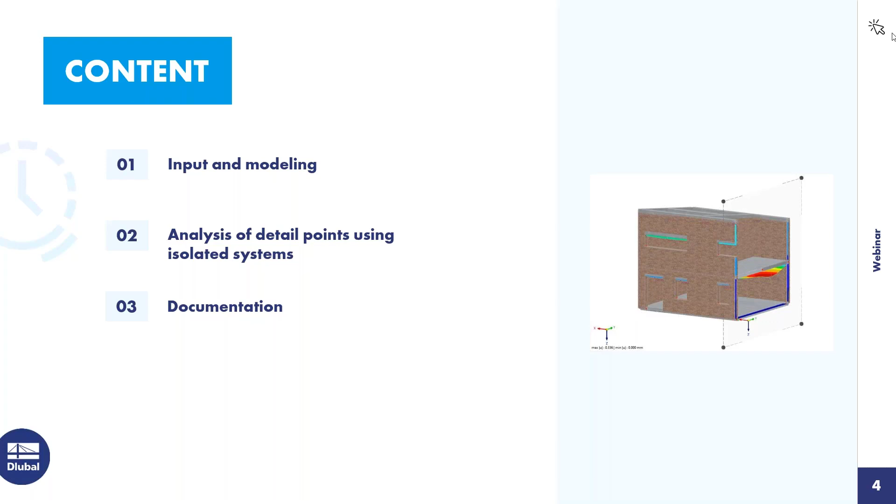So the content of today's webinar is masonry. Today I want to model a building from the beginning in RFEM. In the second part, I want to take a look at some detail points, especially connected to the masonry material. And in the last part, I want to show how you can document the results of the program.

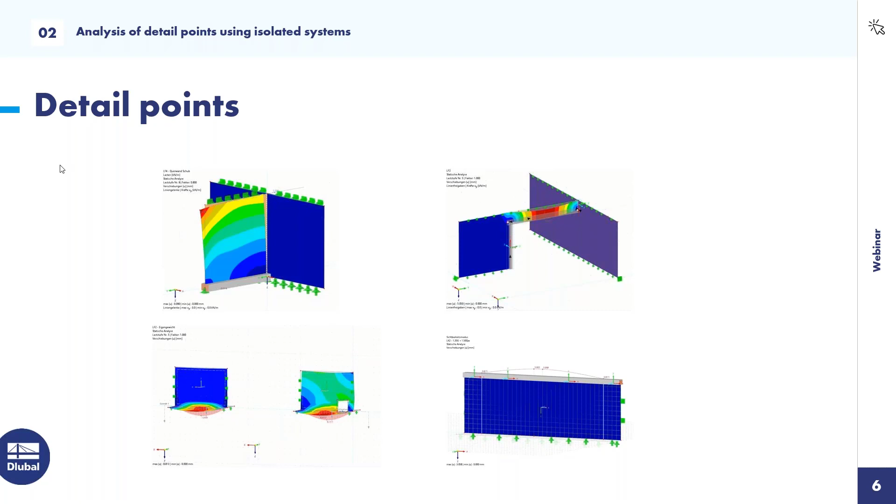In the first part, we will insert a small building in RFEM, and I want to show you how to do it. In the second part, I have chosen some separate models which I have prepared, to take a look at some details. And as I said, the last part is the printout report. So now I want to switch to the program.

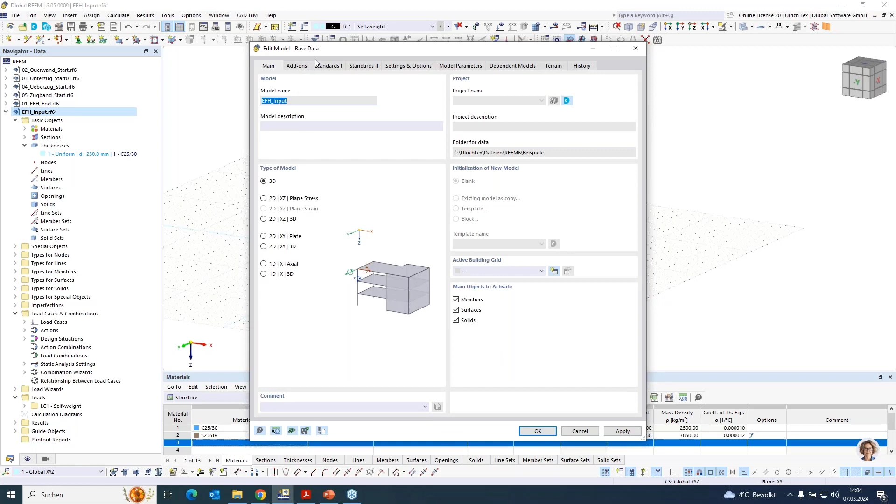Okay, I have already created a new file, a new project in RFEM. It is important when you create a new project and want to use masonry that you check the add-on Masonry. Otherwise, you cannot use the material model for masonry design. So as a first part, I want to create a new material.

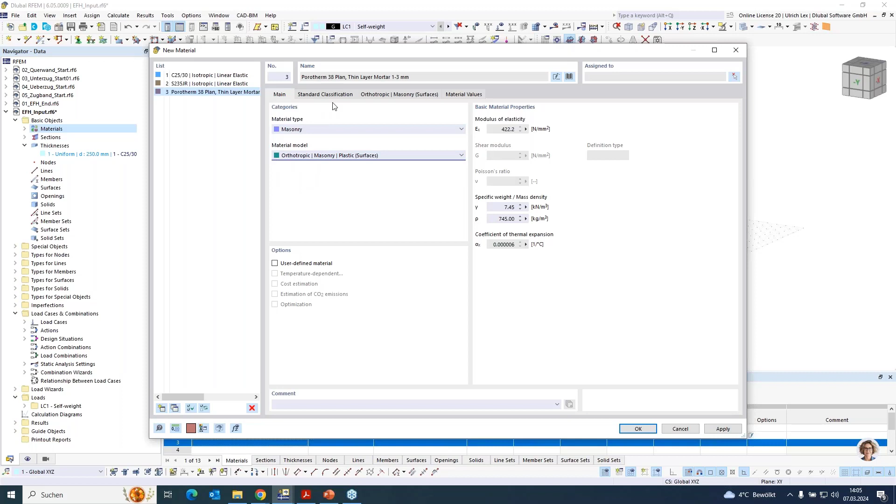You can use some values from the database with material type masonry. You can choose one product you want, maybe Porotherm 38, and you have to choose the material model, the orthotropic masonry plastic. If some products are not available in the database, you can also insert them manually.

In this tab, standard classification, you can choose the grouping of your product. You can choose the mortar you used. You have to insert the dimensions of the stone, and you have to insert the compressive strength. With all these values, RFEM automatically computes the data needed for the material model. That is the modulus of elasticity, the shear modulus, the allowable or ultimate compressive strength, or the ultimate tensile strength.

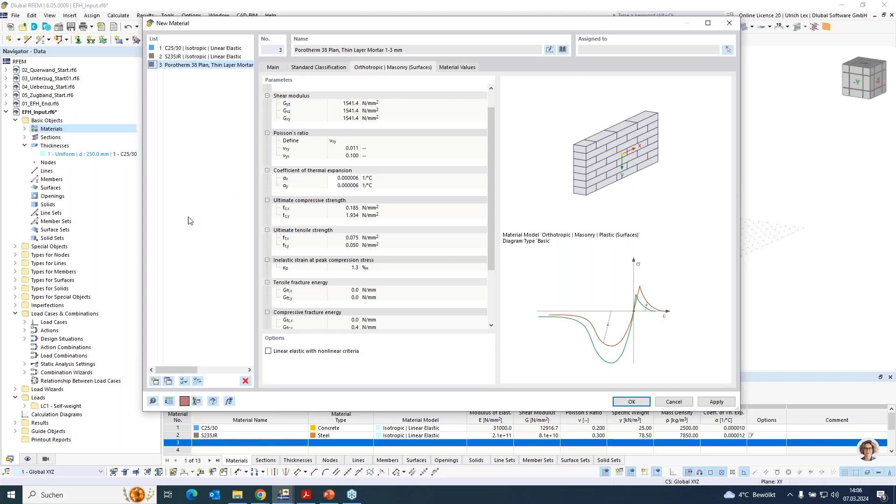So I want to create now a second material, maybe for the inner wall. It's the same as before. Choose one product, maybe this Porotherm 17-50, and go with OK. The second thing I want to do is to create a thickness.

All surfaces need a thickness. The first thickness is already in, 250 millimeters with concrete, for the foundation maybe. The second thickness I will create is 200 millimeters for the concrete slab. For the third thickness I want to use our masonry material, 380 millimeters. And for the fourth thickness, I want to use the material for the inner walls with thickness 170 millimeters. When I have done this, I can start with the modeling.

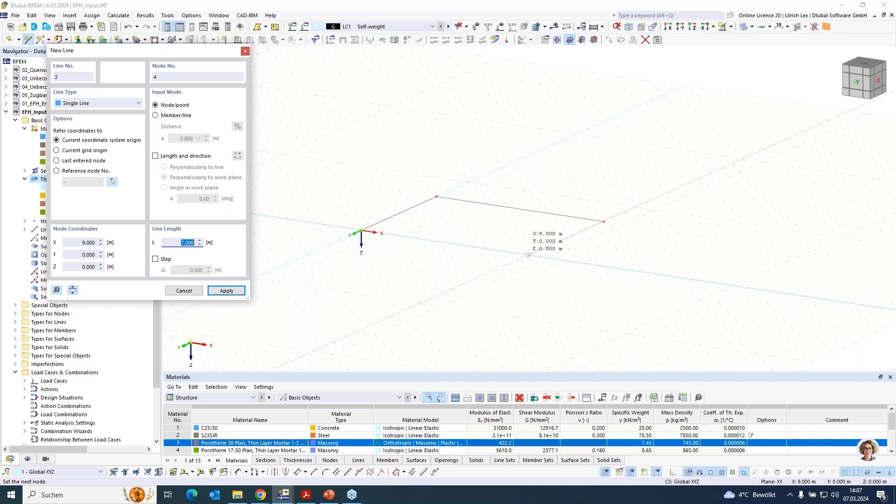Here I have a building with the dimensions 7 by 9 meters. I use my grid points to create the first floor, 7 by 9 meters. Here I can directly assign, with this select boundary, my foundation plate, thickness 250 millimeters concrete. Okay, and choose the lines.

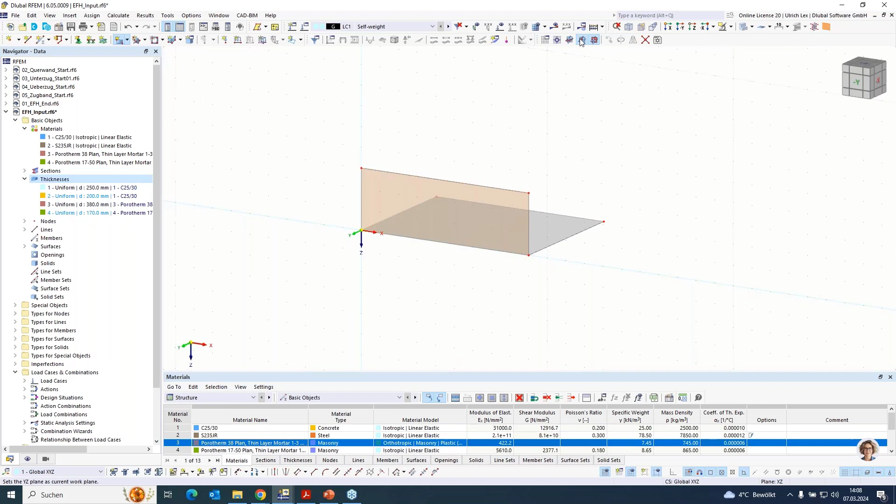So in the second part, I want to change my work plane and create a new surface. I want to choose now the thickness for the outer wall, okay, with a height of 3 meters. I can change my work plane and create the second walls. Now I can directly copy these walls, and the first things are done.

Now I want to create the first concrete slab. Okay, and choose the outer lines.

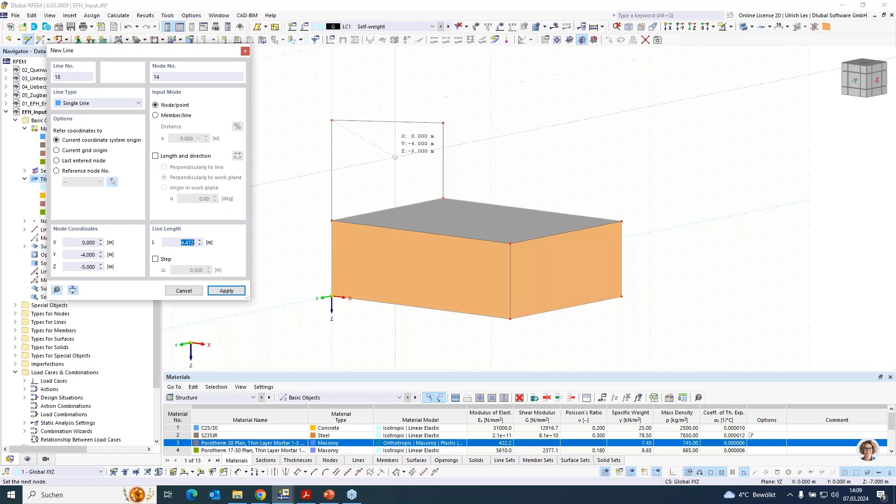So the second floor will be in the front a height of 4 meters, and in the back, a height of 3 meters. As I did before, I can use select boundary with 380 millimeters, and can select and copy the surface, and at the end, the wall in the front and at the back.

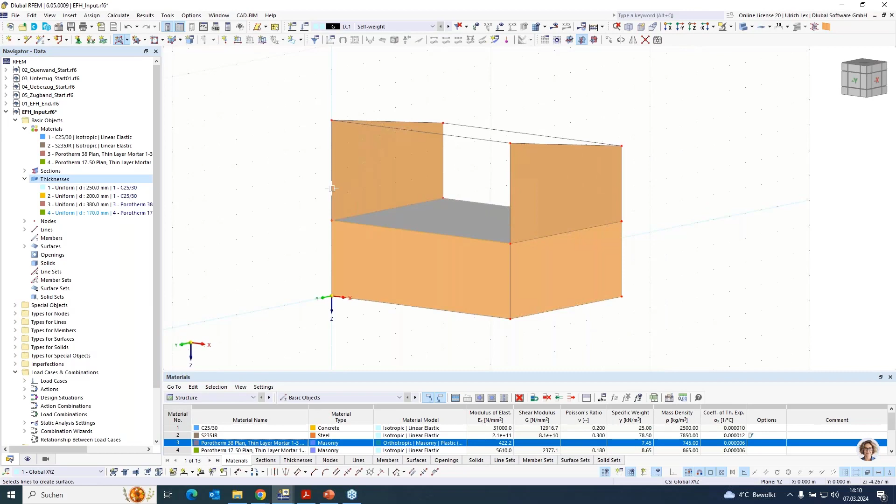Choose all these lines, turn around it, and choose the rest of the lines.

Okay, now I want to create my inner walls. There I select only the ground floor, and change my working plane.

And start to create the lines for the inner walls: 1, 2, 3, and 4 meters. My grid has a space of 1 meter, so I can use it here directly for my modeling.

Change my working plane, and just copy the lines to these points.

So the second wall is in the second floor. So I cancel my visibility mode.

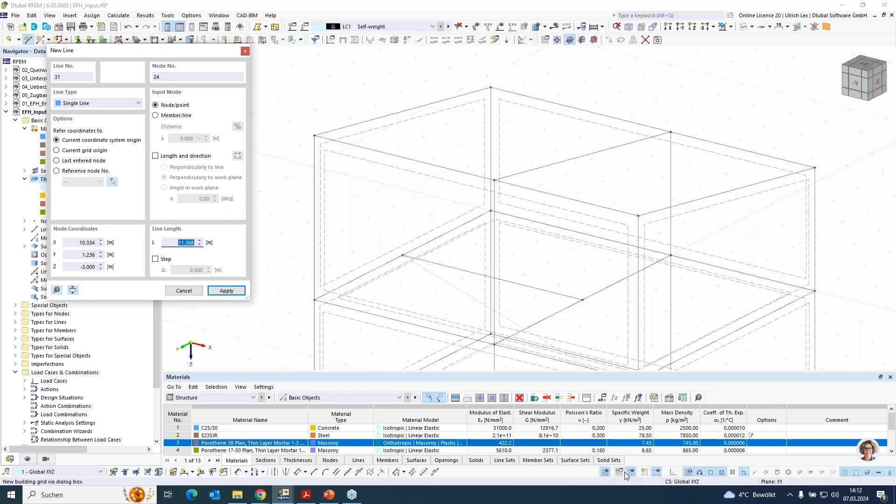Here you can see when I cross the line, then one point is catched automatically. This can be set in the detailed setting for catching the lines.

So now I have created all lines for the inner walls. Then I want to choose select boundary for creating a surface, choose my thickness from the inner walls - the material is automatically changed. Okay, and choose here my walls.

Here. And the third one. So now all my walls are created.

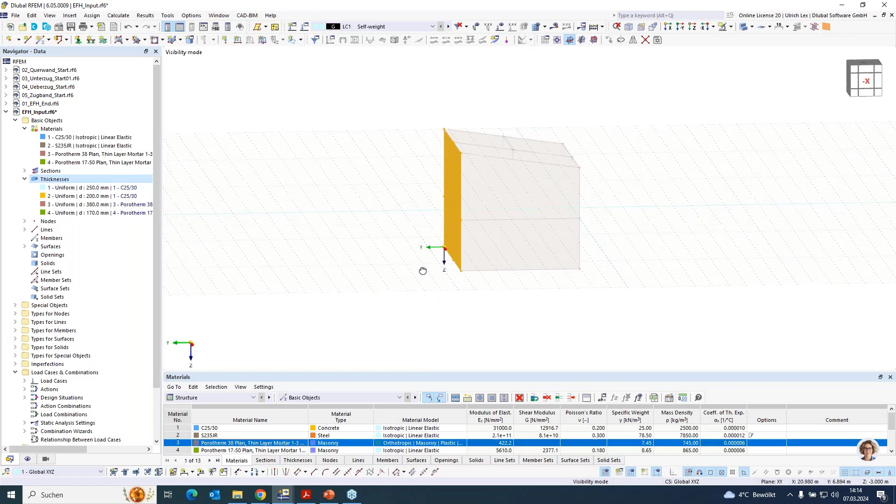As the next part, I want to create some openings like a window or a door. I select again my wall in the front, change my work plane in this plane I want to work. I change my space of the grid points, divide the space 2 times.

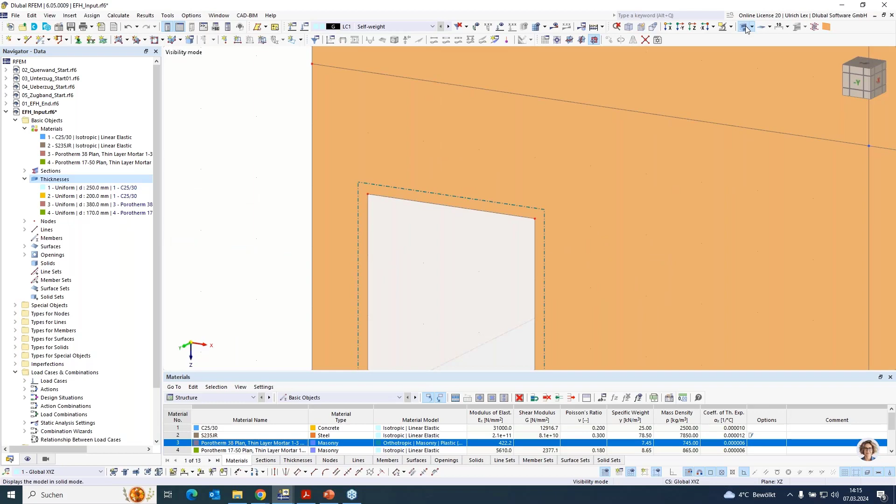The same maybe in this part, and the same in the second floor, maybe a little bit bigger window, and the same here.

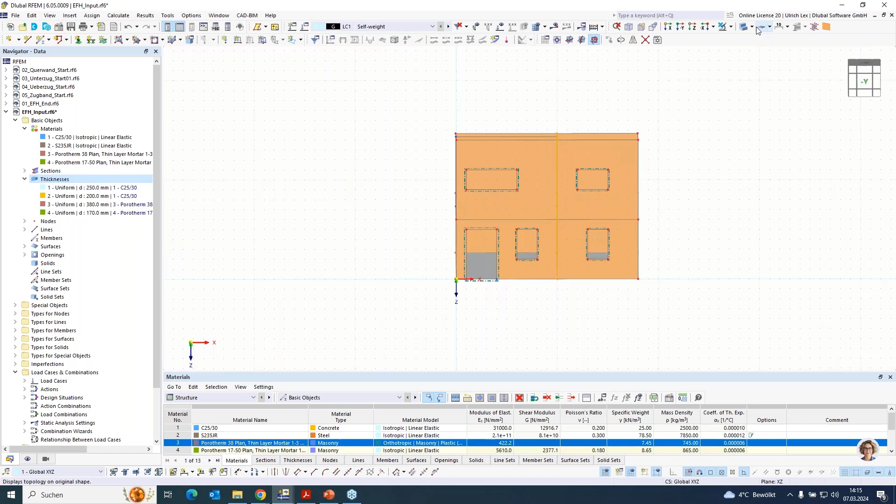In the inner wall, I want to have a door too. So I select my inner walls. I can switch off the background, the hidden objects. For better modeling, I can change my working plane, select the grid point, and can create here a big door.

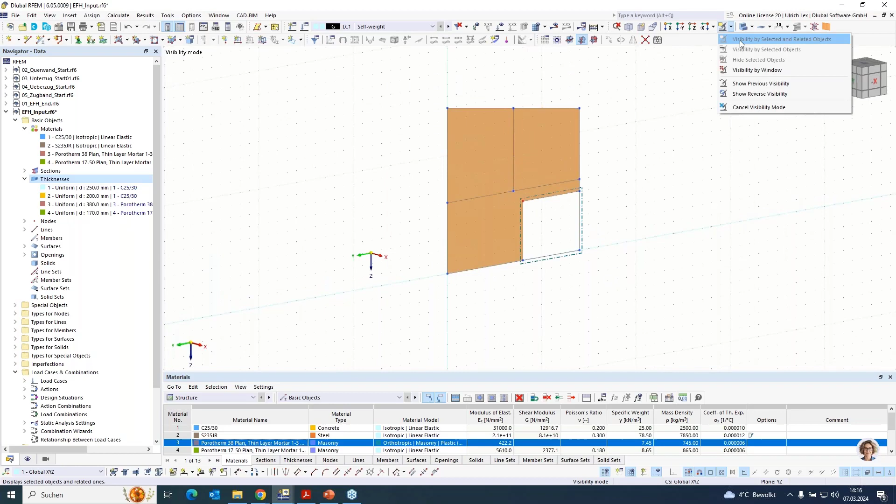So in case of using material masonry, it is important in case of openings that you create something like a lintel above. It's because if you do not assign a lintel, it could be that the system will be unstable because of the missing tensile strength, or the very small ultimate tensile strength in the area above the opening.

So that's why we create here now a lintel. I double click on the line, create a new member. It's a member type beam. I want to select a new section - I can create a new section.

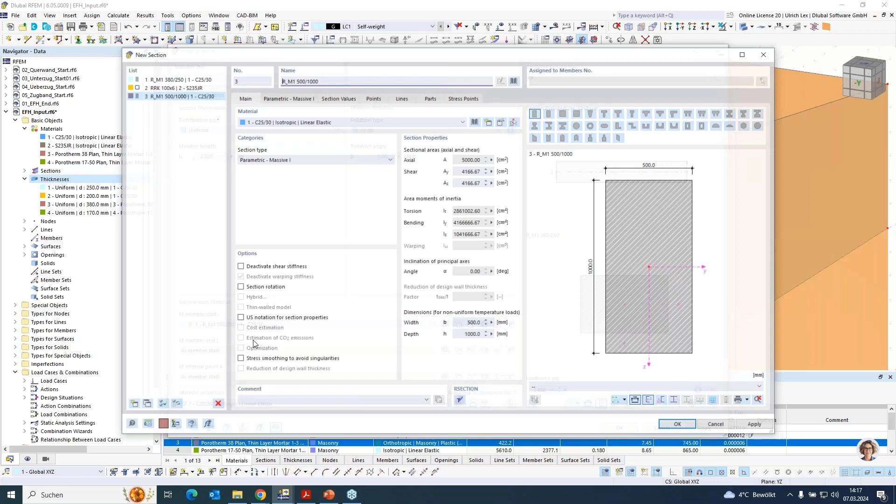Maybe with the width of 380 millimeters and the height of 150 millimeters. Material concrete is okay.

And the second thing is when the window is too big, then it is good to have this lintel a little bit inside the wall. It's because the force from the lintel is not directly inserted into the material masonry in one FE node.

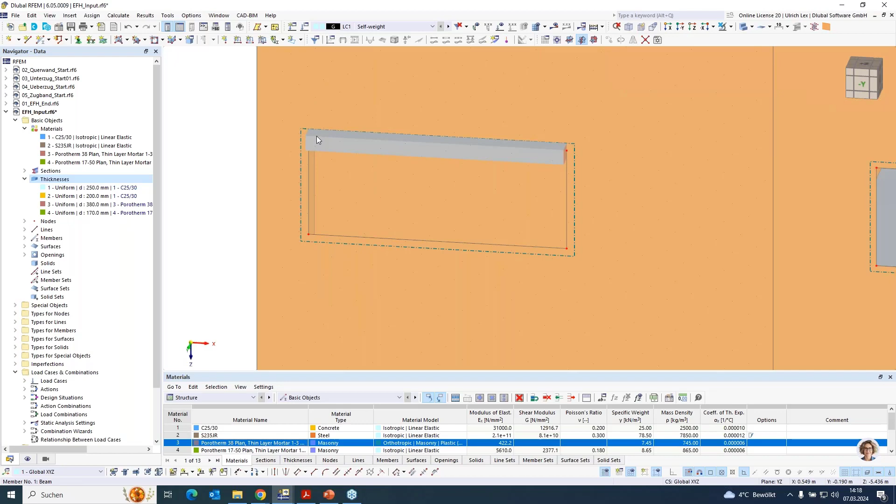So we create a copy of this node, create a copy in X direction, maybe 125 millimeters, and the same on the right side, and create here a line and a section too.

Okay, and okay. The same for the other openings. I select all these lines, double click, and assign a new member.

Okay, the same I will do in the inner wall. I assign a new member. Here I use a little bit bigger section, so I create a new one, maybe 170 millimeter width and 250 millimeters high.

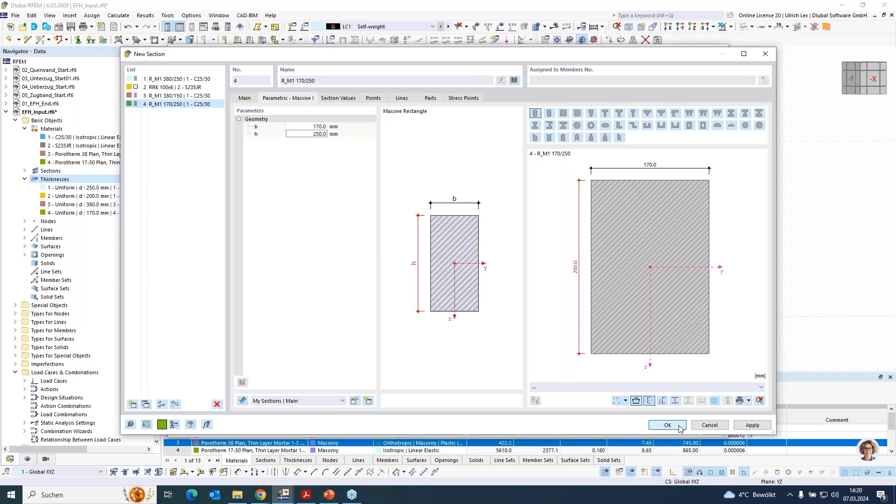Okay. Here I could let be this lintel in the masonry wall too. It would be maybe good on this place, but this example I will have in the details.

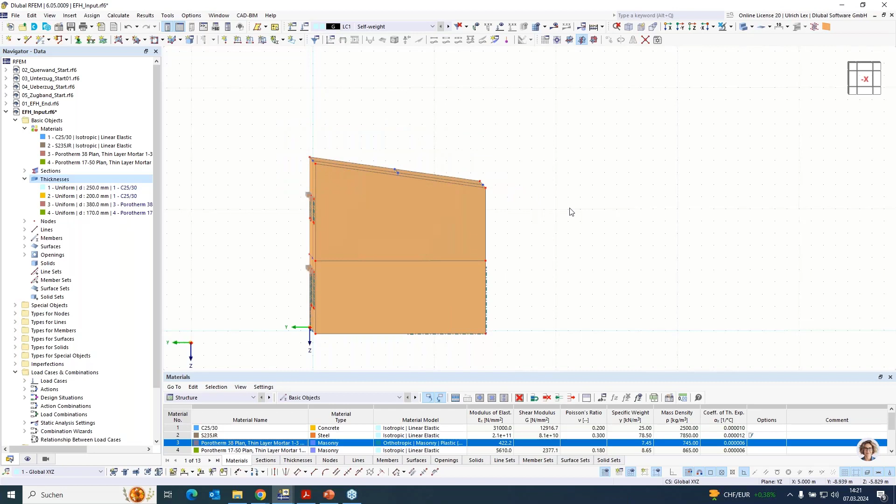So the next part on such a building is on the top of the masonry, we need something like a ring beam. You can create it easily in RFEM when you select all lines where you want to assign such ring beam, and can assign again one member, choose a section, create a new one, maybe 380 and 250.

Okay, apply with OK. And then you have created this ring beam.

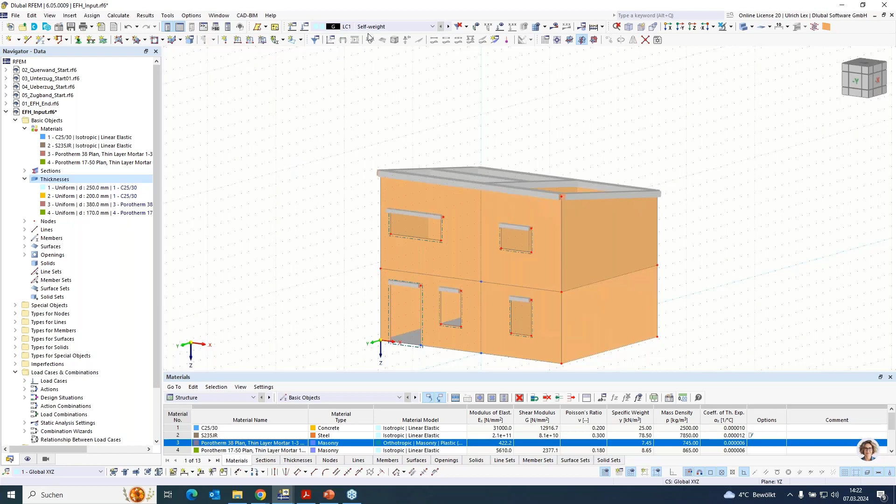So as a last part for modeling, you have to take a look on the wall slab connection. It's a very special thing for masonry buildings. Each time on a place where the masonry wall does not stand fully on, for example, a concrete slab, you need a special connection. It's called in RFEM slab wall connection, and you can assign it if you double click on the surface and assign a new hinge.

Create here a new line hinge, and here you will find the option slab wall connection. As I said, it's used each time where the masonry wall does not stand fully on the concrete slab. In case the wall stands fully on the slab, the material model itself can handle it. Only in case the wall is not completely supported, you need this hinge.

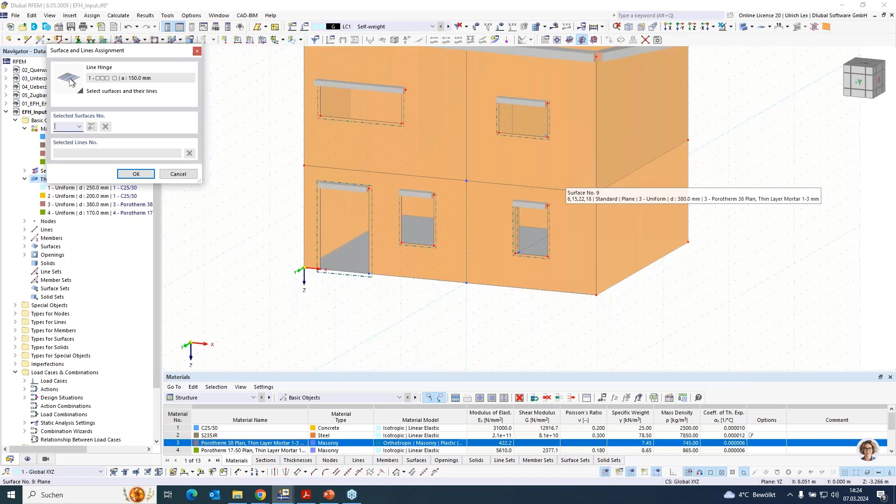We have to choose the lines where this hinge should be assigned. It's all the lines, all outer lines. Oh, just a moment, I have to go back one step.

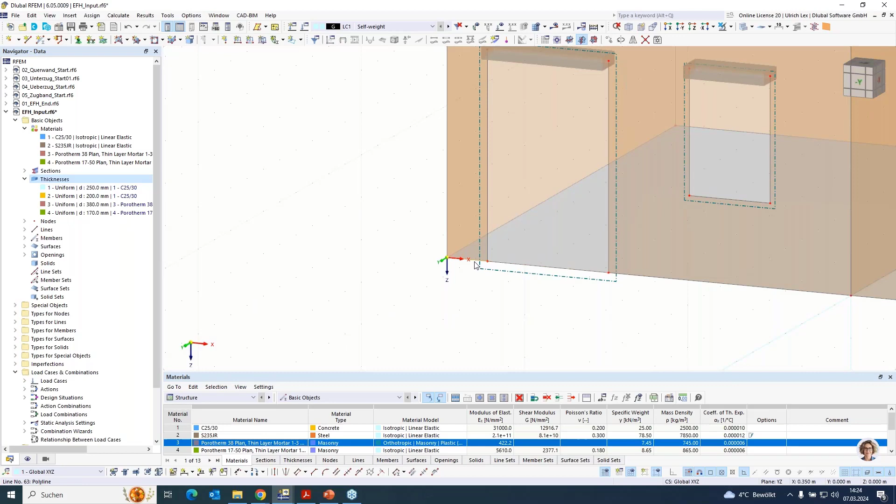I had first to connect these lines and members, because here I have a double line, so I just use this option, connect lines and nodes. So I will have no double lines and nodes in the system.

Then I can assign this hinge again, create a new line hinge with wall slab connection with my offset 150 millimeters, and assign it to all these outer lines. Continue with OK. And now it's important to generate this line hinge with this button on the left. Now two line hinges are created.

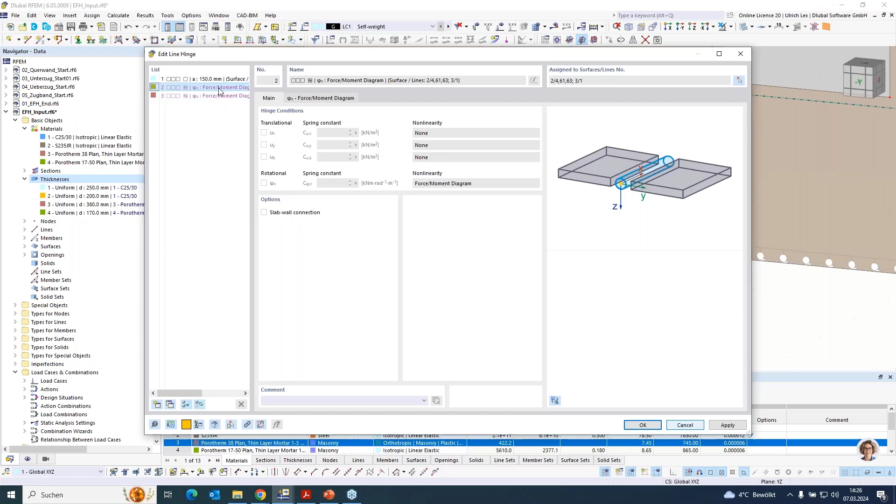I can continue with OK, and I will see that my line hinge for the masonry wall is created. Here I can double click. It's yellow because it's created from the master line hinge, and here is a force moment diagram assigned.

Okay, the same I will do for the slab in the first floor. Double click on the surface, assign a hinge, create a new line hinge using slab wall connection.

If I have the same offset, I could use the same hinge too, but now I generate a second one. Choose all outer lines. Continue with OK. Generate the lines. Continue with OK. And now I can see that for the wall above and the wall downside, two separate hinges were created.

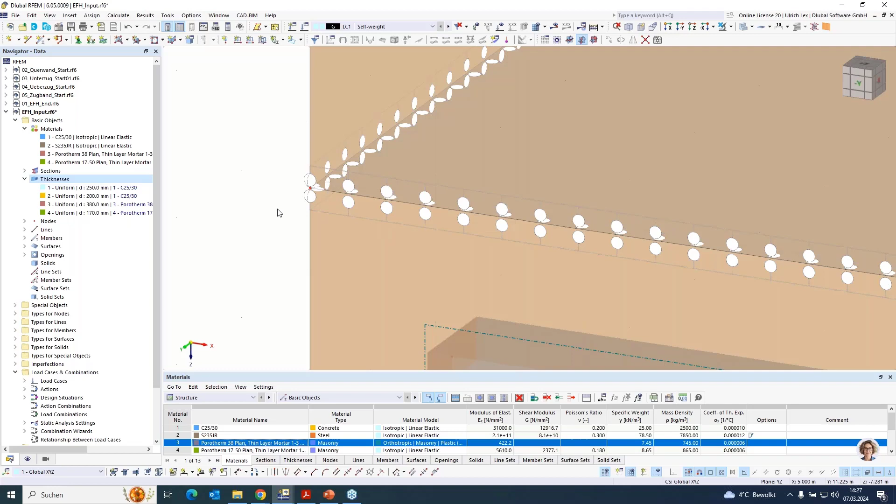Okay, as a next step, I had to choose a support. Here I want to choose the support of the base plate, supported simply as a rigid plate.

Okay, and on the last step, I had to create some loads. The self-weight is created automatically. As a next step, I will create the live load, imposed load.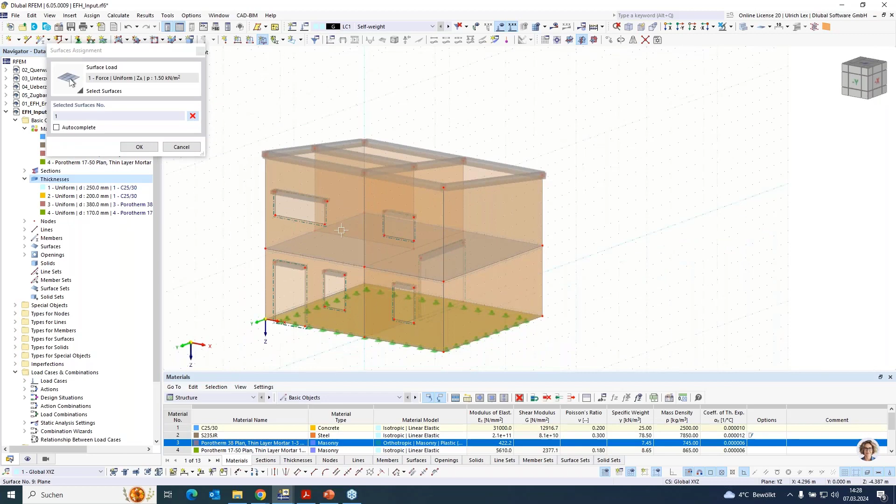Okay. Choose maybe for the self-weight 1.5 kilonewton and assign it to my slabs. Okay.

And the same for the imposed load, maybe 1.8. And continue with OK.

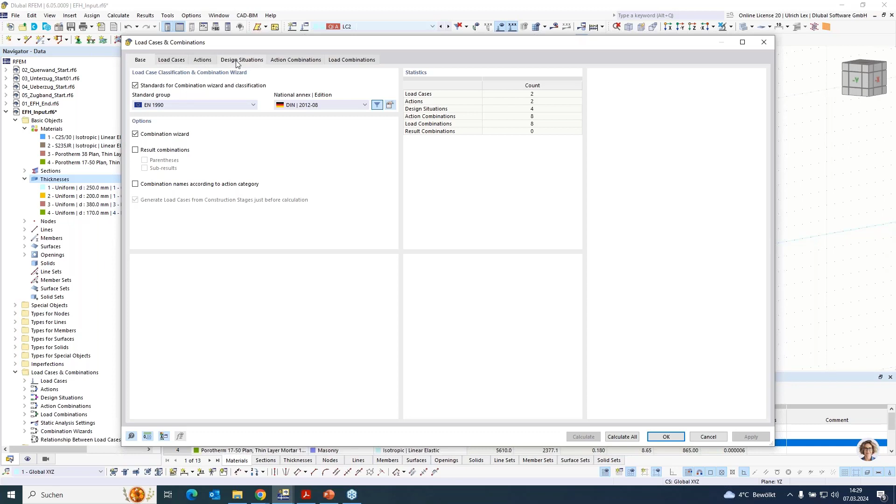The combinatorics are done automatically if you have set the combination wizard on. Then you can choose the design situations. You can create a combination wizard where you can choose a static analysis setting. For masonry, it's good to compute geometrically linear or with large deformations. It's the best for the material model.

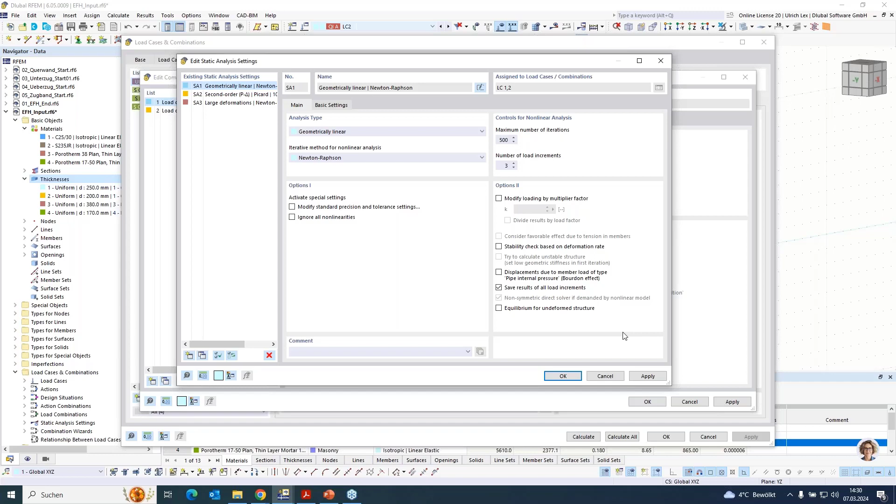And for the nonlinear plastic material, it's important to increase the number of load increments, maybe to 3. You can allow a little bit more iterations, and here you can save the results of all increments. Then you can take a look at increment 1 or 2 too. Okay, continue with OK, and you get now the load combinations here.

So as a last step, we can take a look at the mesh settings. For masonry, we normally use something about 0.25, 0.2. You can click OK and apply, and then the mesh will be created.

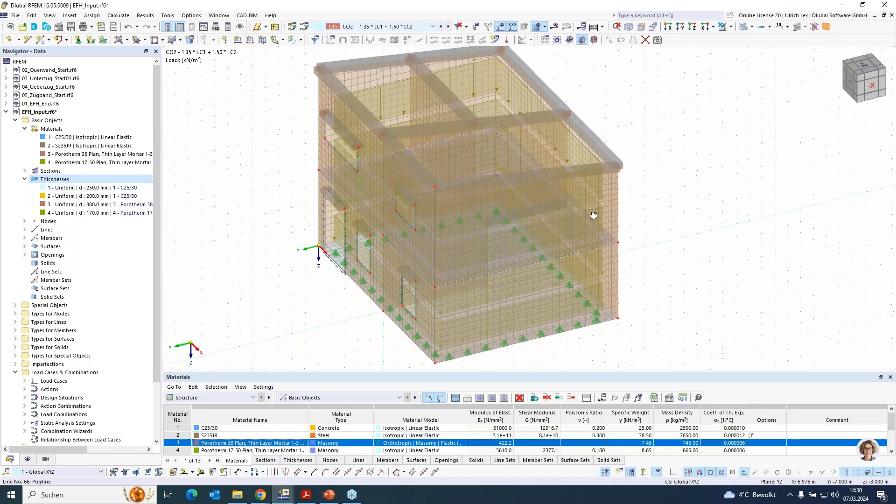Please be a little bit careful that you have a good mesh, because it's very important for the calculation, for the nonlinear calculation. So after that, we can compute the first load case, and when it's computed well, then we can go to the second part, to the details.

Here you can now see the calculation process where the system is computed with the first load increment, now the second, now the third, and then it should be finished. Exactly.

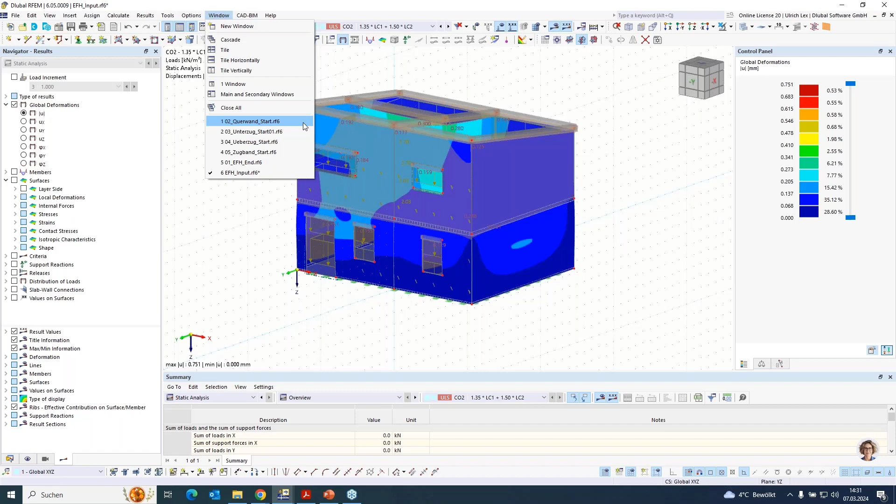Okay, now I want to switch to my detailed systems, and here I have the first one is a part of masonry where you have maybe some outer wall, exterior wall, and one interior wall. Mostly you have two different materials, maybe as I choose it before, like a wall with 380 millimeters width, and for the inner wall a different material with 170 millimeters.

If you build up these walls, then generally the outer wall is created, and after that the inner wall will be created. So the connection between these walls is not rigid, I would say. Here are a lot of things you can use.

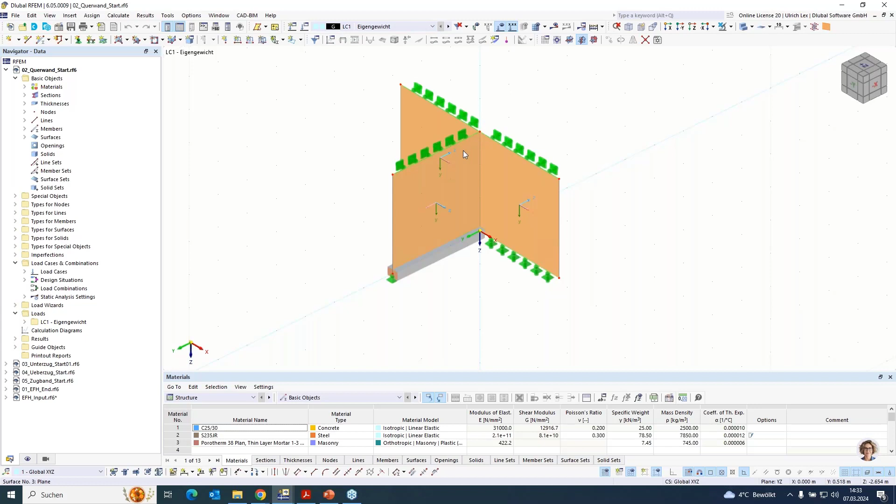One thing is you can use such a wall connector. I looked in the internet and found something like this. This is a wall connector. It is assigned in each row of the masonry stone and connects these both walls. So, but this wall connector cannot transfer some shear loads, I would say. These connectors can only transfer tensile loads. So, how do you consider this in RFEM?

I want to show you now. When I take a look in the data sheet, I will find that one connector can have a maximum tensile force of 0.5 kilonewton. It's assigned in each row. Then you have 0.5 divided to 0.25 from the height of my stone. Then I will have a force of 2 kilonewtons per meter in this edge.

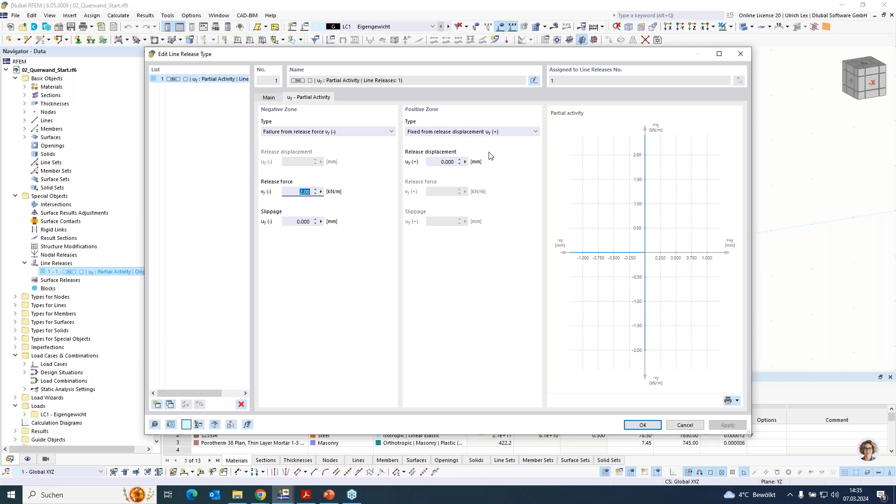To create this, I can use the special object line release and create here a new one. As a release type, I can choose a partial activity in Y direction. And this partial activity could be that the connection is released from a force of 2 kilonewton per meter. In the pressure direction, I would say it's fixed now, but here you can release it too.

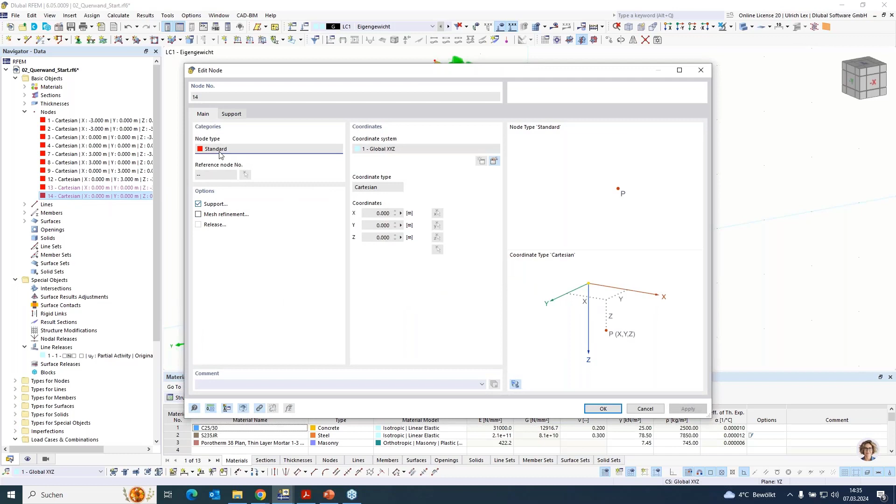So this release I can assign to the surface. Okay, I can say my released objects after that are the surfaces. Continue with OK. Now the whole line is released. That's why I have to assign on node 14 - this is this node - a new support. It will get - my system will get unstable.

So after that, I will create a new force, maybe a horizontal force of 5 kilonewton in direction Y. And I want to compute this system. So for the mesh, I set it as before, like about 250 millimeters. Here I increase the load increments so that I can show you the results better.

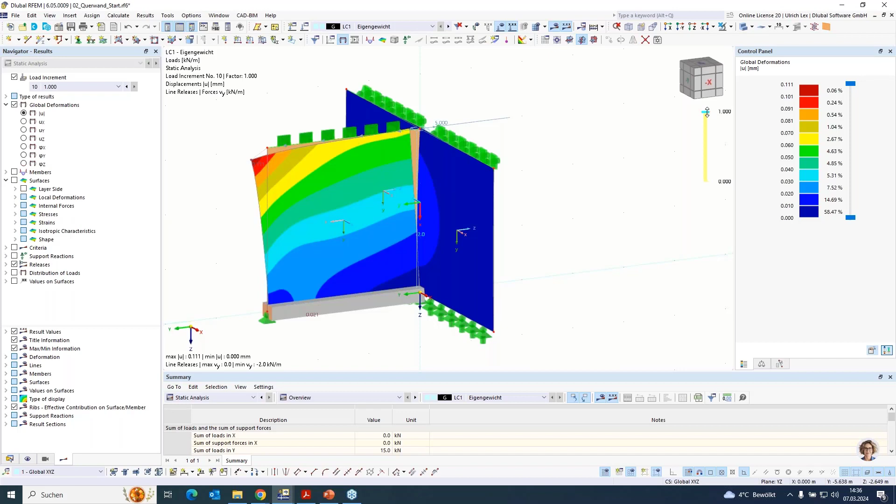So you can see that the inner wall is released from the outer wall. When I go some load steps back, maybe in the first one, we can see that the lines are connected. We only have a force of 1.4 kilonewton. And when I increase the load, then you can see that the release of this inner wall is getting on.

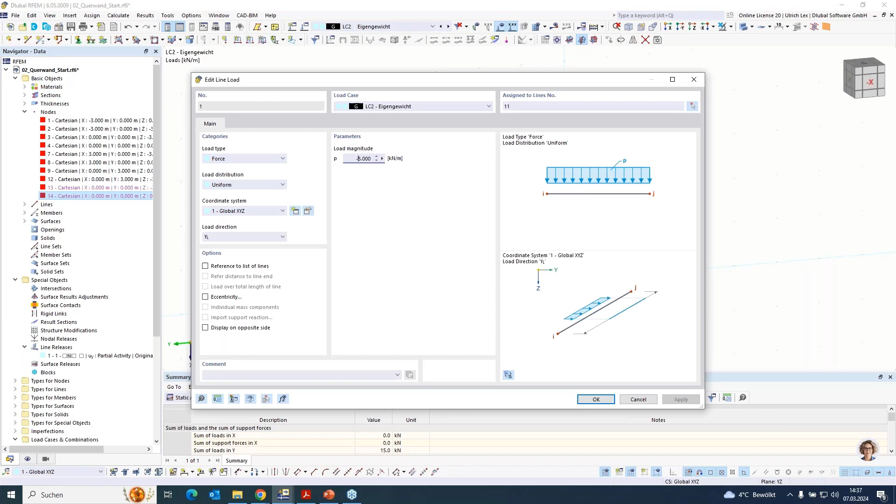As a test, we can create a second load case where I copy the load 1 and change the direction of the load. And here it should be now connected to the outer force, to the outer wall. And this is exactly what we want to have.

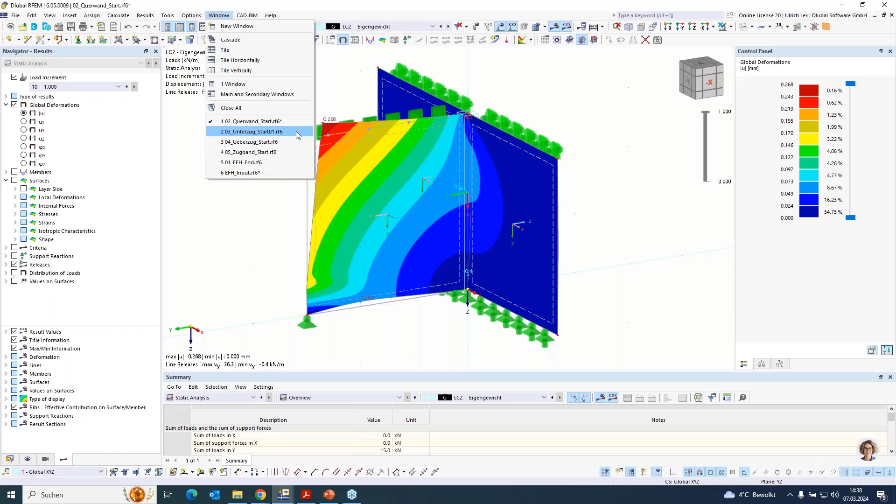Okay, as a next example, I want to show you my system with the lintel. Here I have the problem that the connection between the inner wall and the outer wall is not, I would say, not connected. Only the lintel, or the force from the lintel, should be reacting in this outer wall.

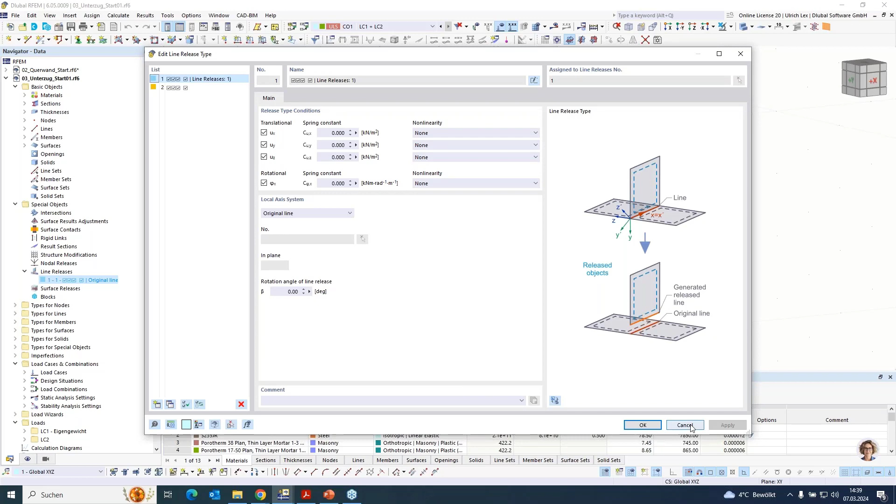So I can continue as before and create here a new line release. I assign it to this line. Now I choose the release type fully, because I'm not sure if on this place is really a wall connector built. So, on the safe side, I did not connect these two walls on this place.

So I have to release the wall. And now I want that the force from the lintel acting is not released - it should be acting on this outer wall. That's why I can define this definition object, my node 4. So there is no release created, and the force is acting on the outer wall.

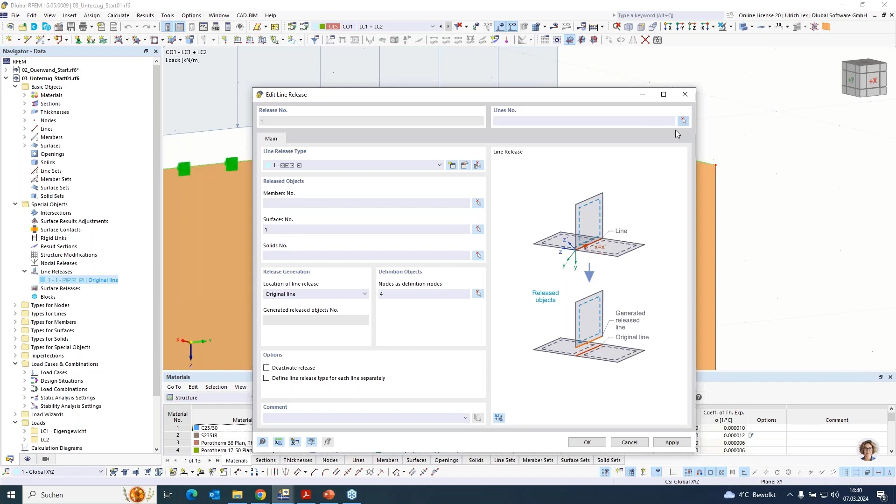Okay, continue with OK. And now I see on this one node is no new node created, and here is a new node, a release node created. Okay, just take a look on the results.

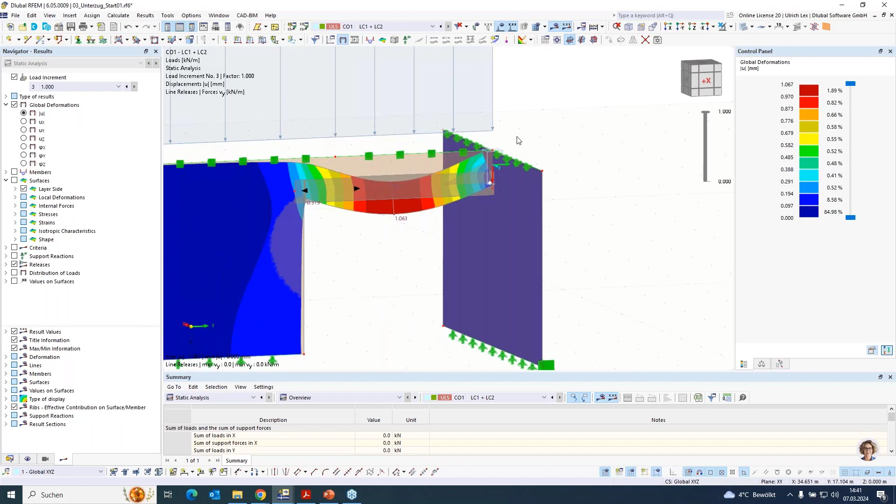And when I take a look at the deformations, I see that my masonry material is released, and my lintel force is acting on the outer wall. I can also see this when I take a look only at the outer wall. And here I see that the whole load from the lintel is acting on this one FE node.

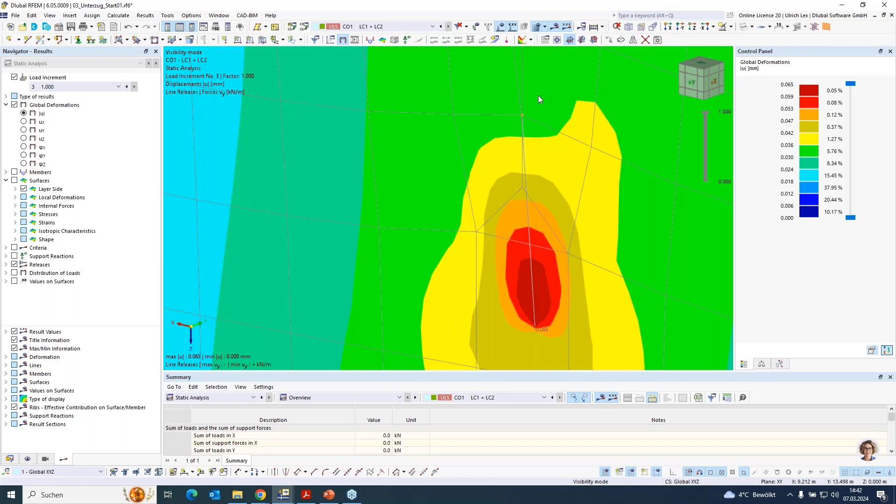Maybe this could also be a problem, that so much load is acting on one node. If this is a problem, then you have the possibility to copy this one node, and a second time in the other direction, and create or assign here a small beam, maybe a rigid beam.

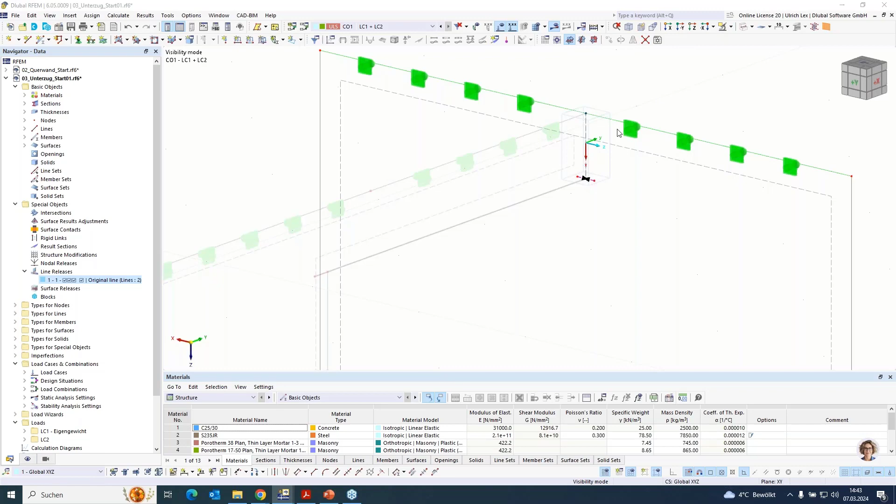A rigid beam, so that the force is smoothed at this point. If you take a look at the results, it should be the same as before. Only the force in this one node is a little bit smoothed. So this could avoid some problems if one point of the material is overloaded.

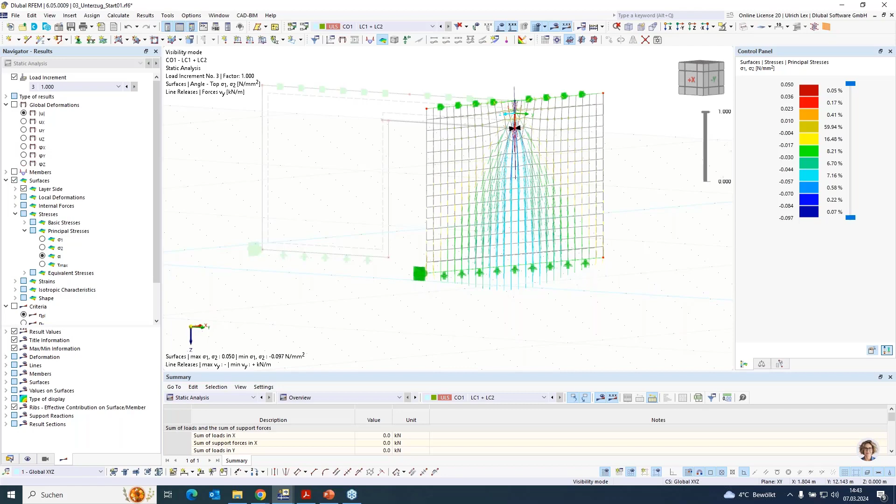So here you can see, when you take a look at these criteria, and maybe not the criteria. If you take a look at surfaces and the stresses on this alpha, you can see the load distribution in the wall, and you can see that we have, as is common for masonry, a distribution of maybe 60 degrees in the wall, and the same you can see in the support reaction, where we have in this area this load from the lintel.

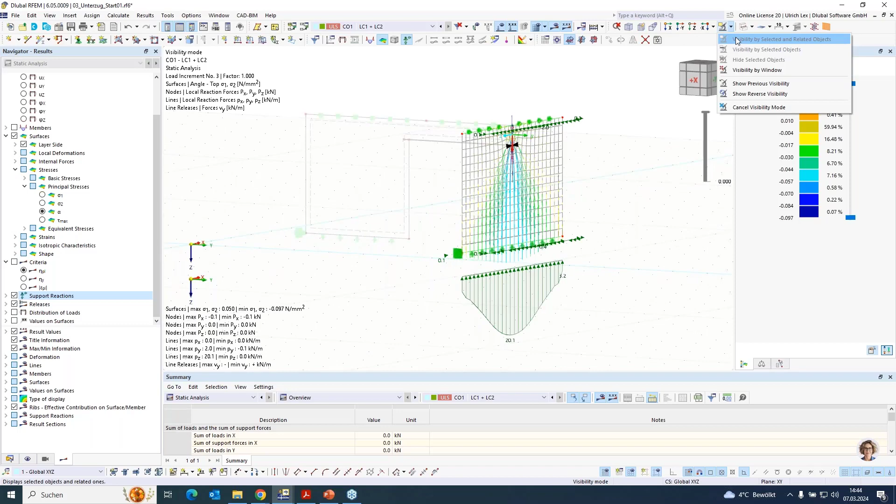Okay, on the second side, there could be problems too. When we have here a too big force from the lintel, depending on what is on the floors above, it could be that a concrete column should be located at this place, but this is also easy to do.

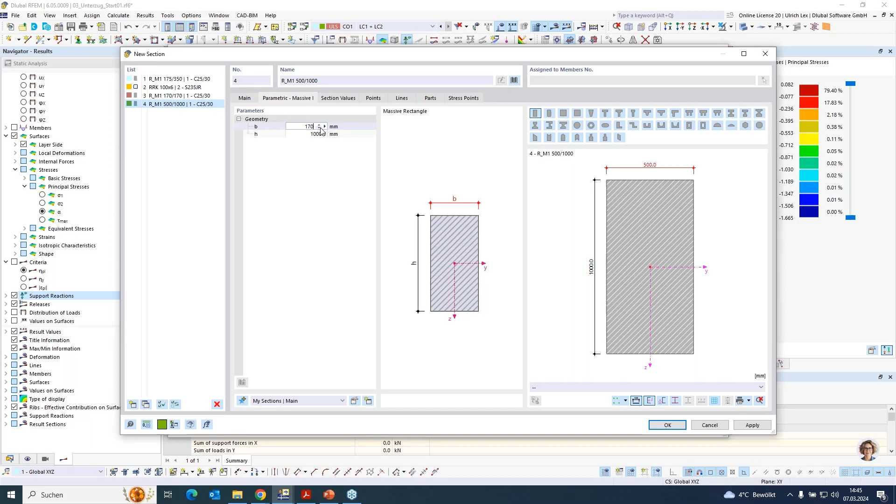When you double click on the line, you can create a new member again, as a beam, and create here a new section. Maybe 170 to 170, as a concrete column.

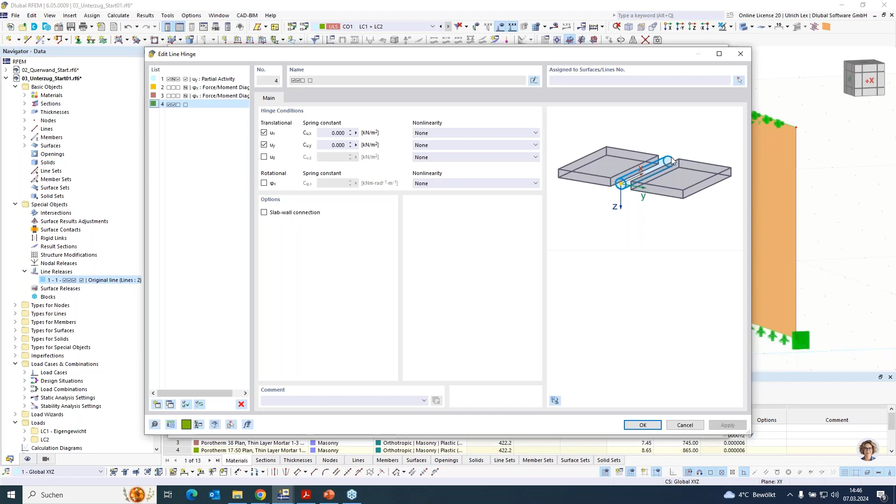So one thing you have to think about is that the masonry wall is now connected fully with the concrete beam. Here you can insert again something like a new line hinge, and maybe let it free in X direction, so that no shear force is between the concrete column and the masonry wall. Okay.

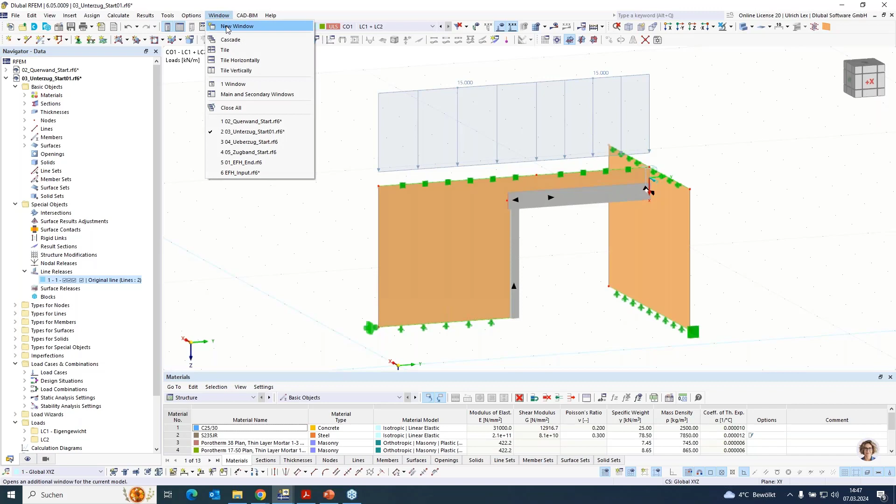Okay, so these were the problems of this example, and now I can take a look at the next example. When you have something like a wall above a concrete slab, where you have no support in the floor below, then when you take a look at the results, you will see that the masonry wall is acting similar to a beam. You will have some forces, like a pressure arc in the masonry wall.

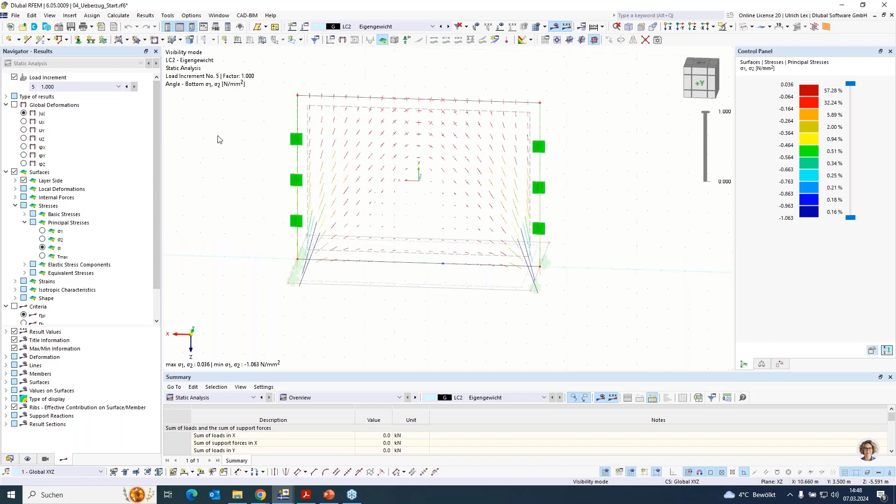Normally we only have to know it, because when an opening is created here afterwards, this pressure arc is destroyed and the behavior of the wall is different, and therefore you may need more reinforcement in the concrete slab. I want to show it now.

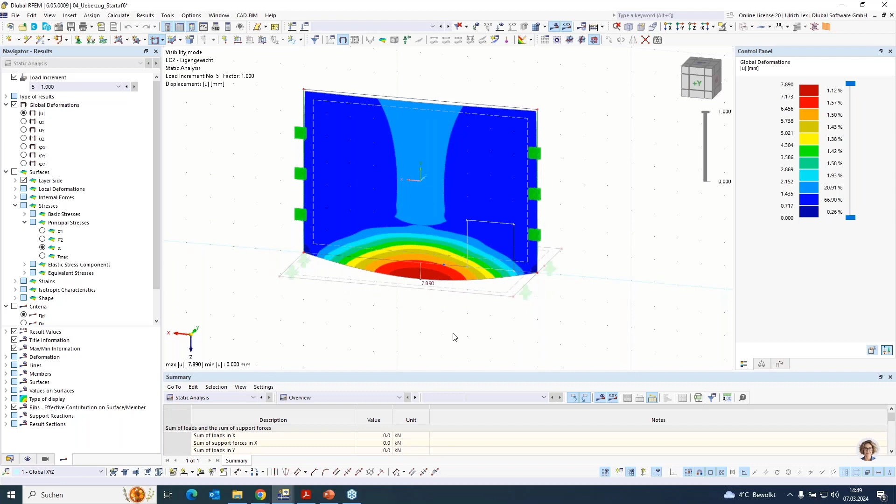When we take a look at the deformations, here we have 7.9 millimeters. When I now create an opening, maybe for the heating or something else from the house technique, then you will see that the deformation of the wall is increasing a little bit. Therefore, you need more reinforcement in the concrete slab, and you have to consider it in your static model.

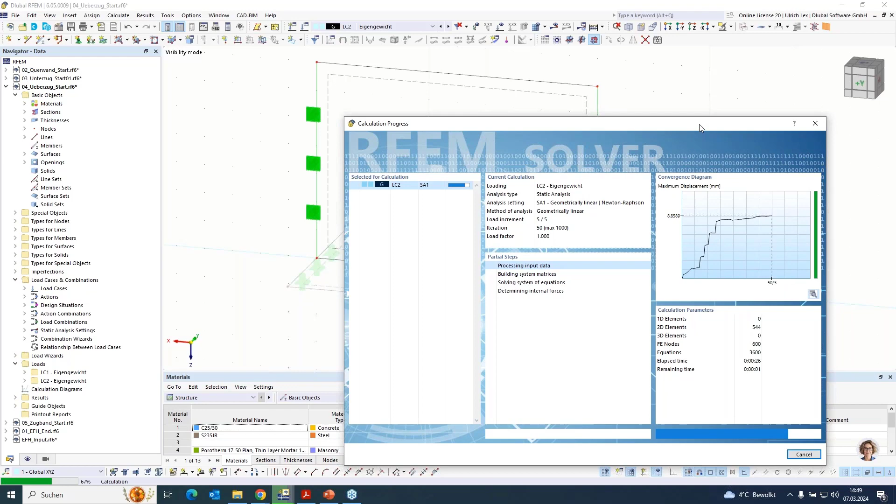So you see the deformation is a little bit higher. When we take a look at these trajectories, you see this pressure arc is destroyed. More force is acting on the concrete slab. Therefore, you have to consider it.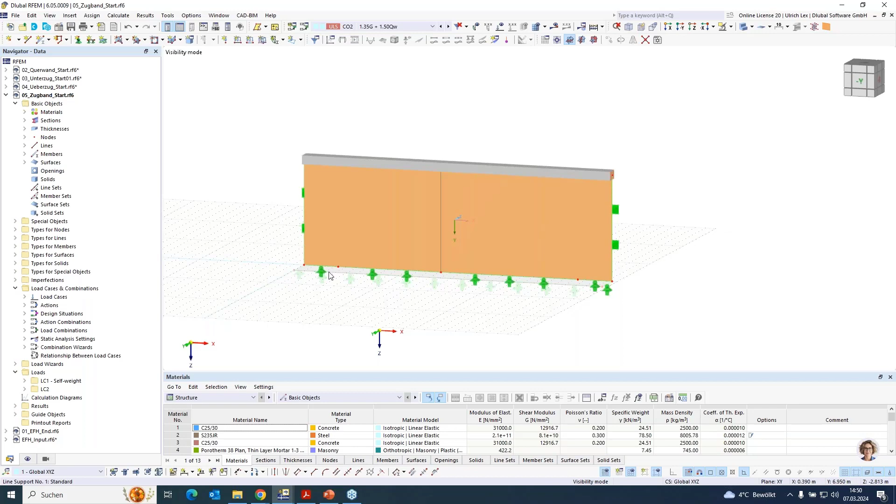So the last example is one from the roof, from the top floor. Sometimes you have to consider some wind loads, tension loads from the ring beam, and have to anchor this in the concrete slab. This you can do easily when you create a new beam. You can use the tension beam here, and you can insert this tension beam into the surfaces,

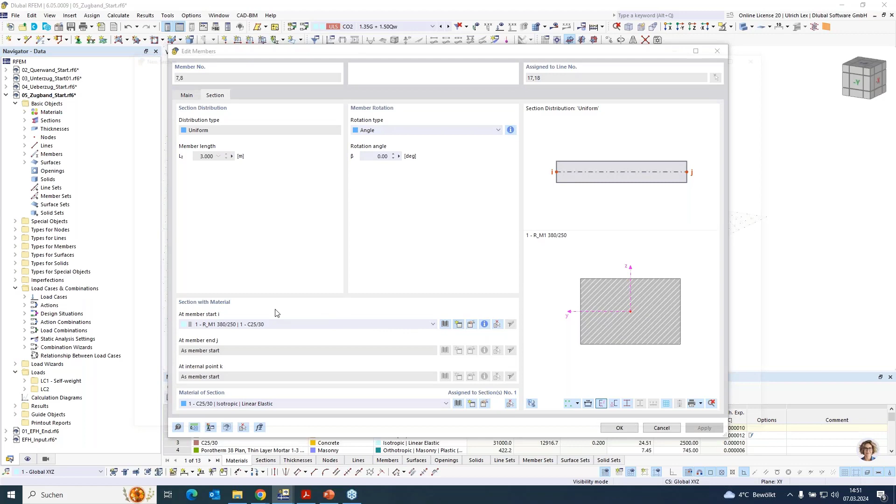maybe like this, and tension, and like here. Here I want to change the section. I can create a new section. I have already created a section, maybe 12 millimeters.

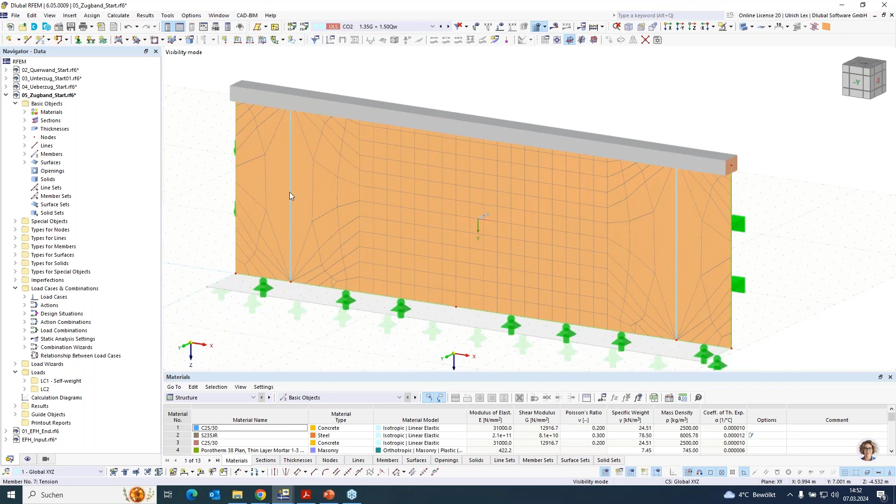Okay, as a tension. But now when you create the mesh, please be careful, because you are using now a tension beam, and the tension beam is not meshed, it's only meshed on the end points. And here it's generated or integrated to the surface.

Therefore, we have to double click on the surface, go to the tab Integrated, take off the automatic detection, and take off these two lines. Therefore, only line number 5 is integrated. Continue with OK. And this means that this beam now has no connection to the surface. Now when you create a new mesh, then everything is okay again.

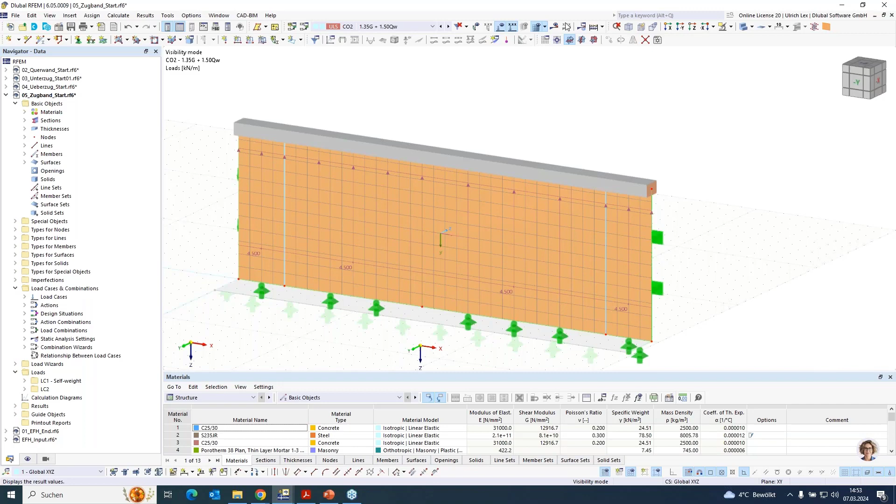I have created a load like tension in this direction. When I now compute it, you will see that the force is acting in the beams. Or not. Where is my mistake? Just one moment.

Somewhere I have made a mistake, but I want to switch to my second file. So here you now see that the load is acting on the tension beams and not on the wall.

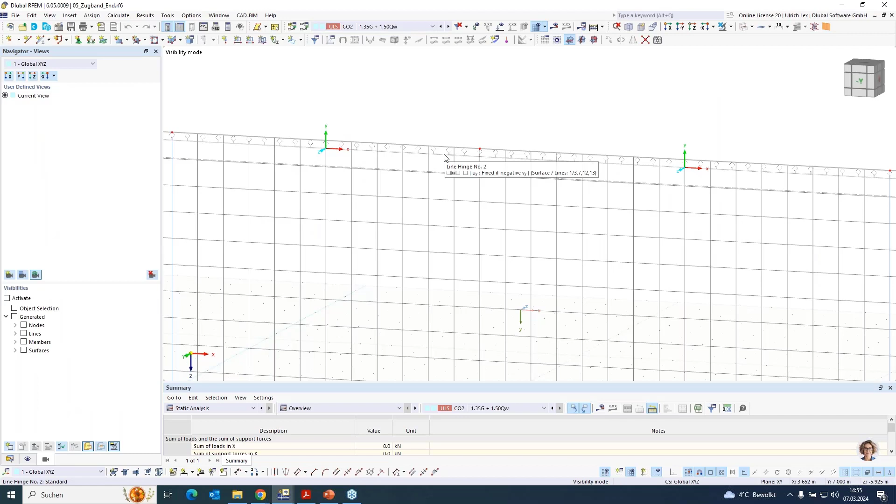So that it is not acting on the wall, you had additionally to assign a line hinge, so that the ring beam is not connected to the masonry wall. Here I created a new hinge with the nonlinearity that it is fixed if the force is negative, and that means if the force is tension, then it is free, and if compression, then it is fixed.

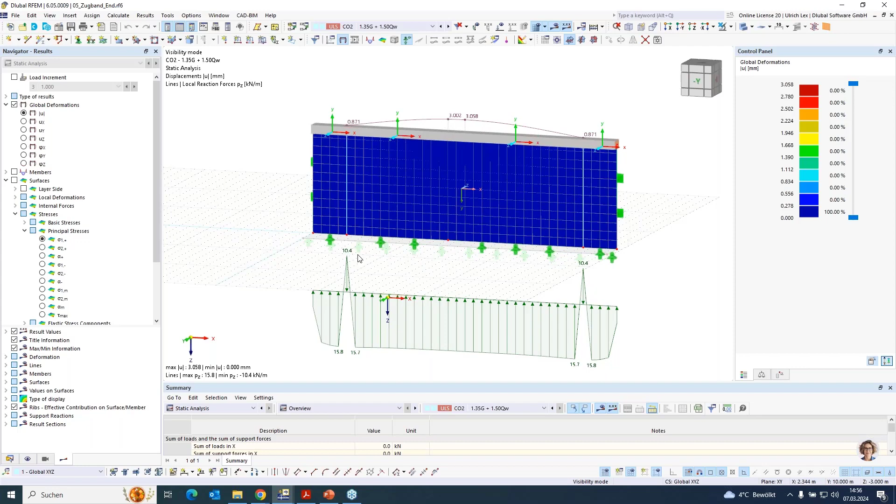Okay. And here you can see that in the wall there are no loads from the wind suction. It's only in the concrete slab.

Okay, on this part I want to switch to the third part and go back to my building we created before. For the documentation, you can use all things we have available in RFEM. The most important thing is, I think, the stresses. You can take a look at the strains, because when the strains are too big, it is a hint that cracks exist in the masonry. I showed it in a webinar before, where on the slab, this sliding slab on the edges, the cracks are here.

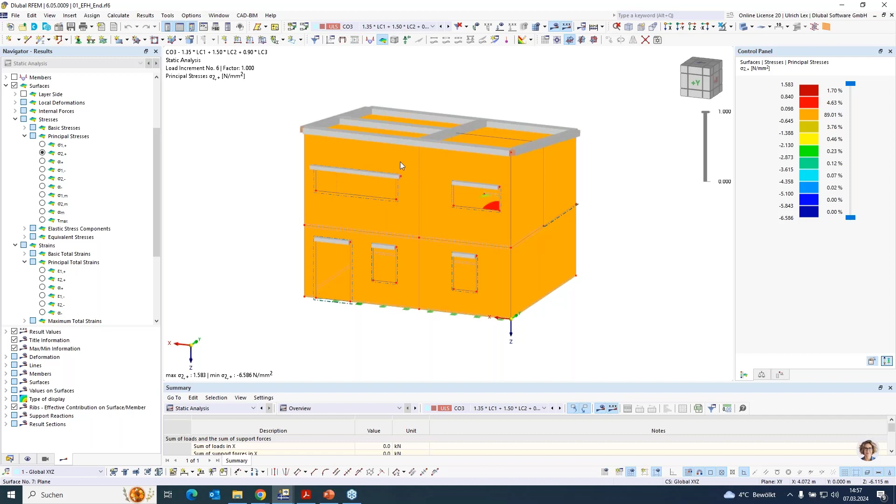You can take a look at this criterion. This criterion is a hint where the masonry is in the plasticity of the masonry. It's not a hint that it's overloaded. There are two states. One is the plastic state, and blue is the linear elastic state. But here you can see where big loads are in the system.

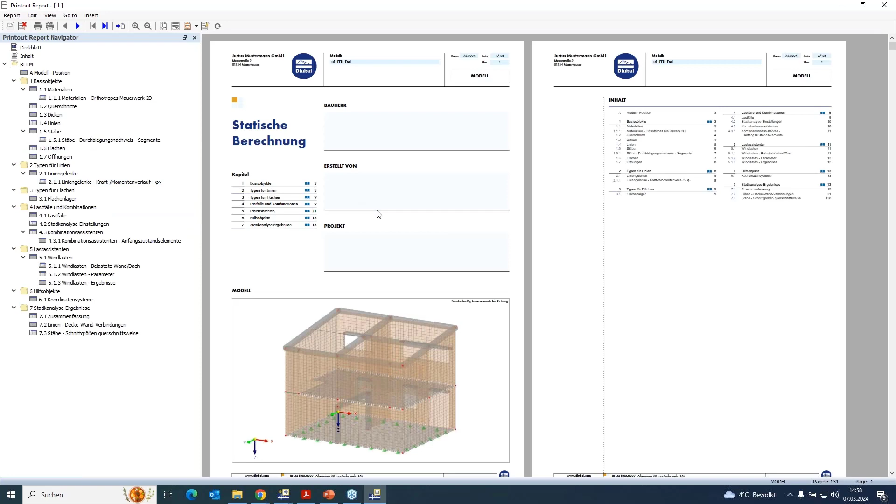And of course, we have the printout report. If I open the printout report, you have a lot of tables, a lot of things implemented. All things you have inside, and you have also documented the things from your material. I just want to switch the language. You have also documented the material properties of your masonry.

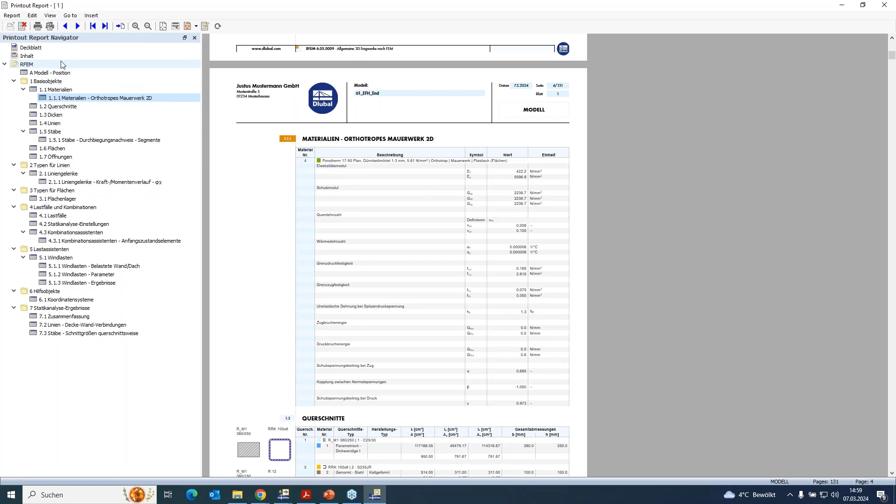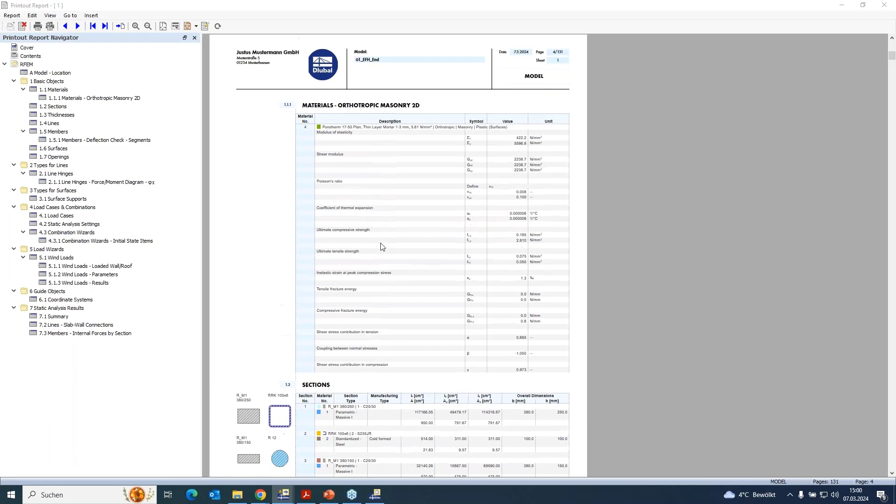I'll just set the language to English and open it again. So now it's okay. Here you can see the ultimate properties of your material that you have used for calculation.

So a design check for the material does not exist because of the calculation. It's a plastic calculation, so we cannot give any ratio. Only when the calculation is fully done is the ultimate strength okay. And this is the design check, the only design check we have.